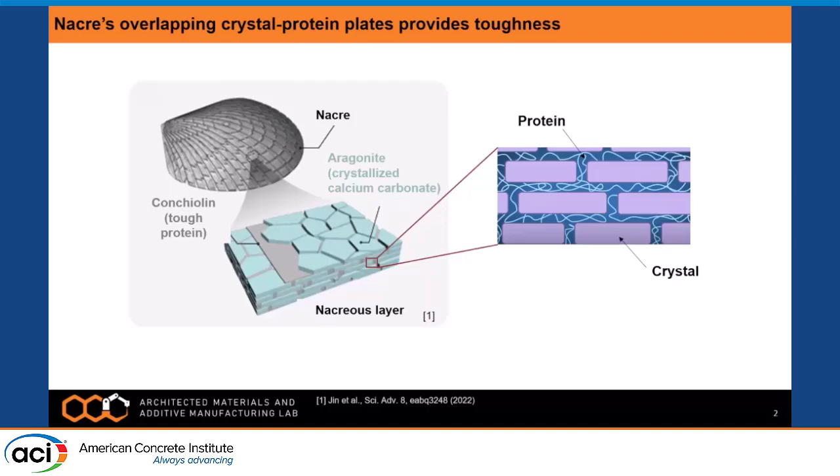The hypothesis we made in our lab was that these hard, soft multi-materials will enhance the mechanical performance. Before we can move on to talking about how we can 3D print these things in the lab, we can make a hypothesis that if you combine materials of varying constitutive properties and arrange them in a certain manner, for example here we have a layered configuration, we can achieve a much enhanced overall performance.

For example, here we're talking about force displacement. You can look at the area under the curve where you see for the brittle materials, for the monolithic material, you'll have such a brittle response. If you move on to seeing what happens with a hard multi-material, you get a slight increase in toughness, but then a much more substantial increase in toughness if you look at hard, soft multi-materials.

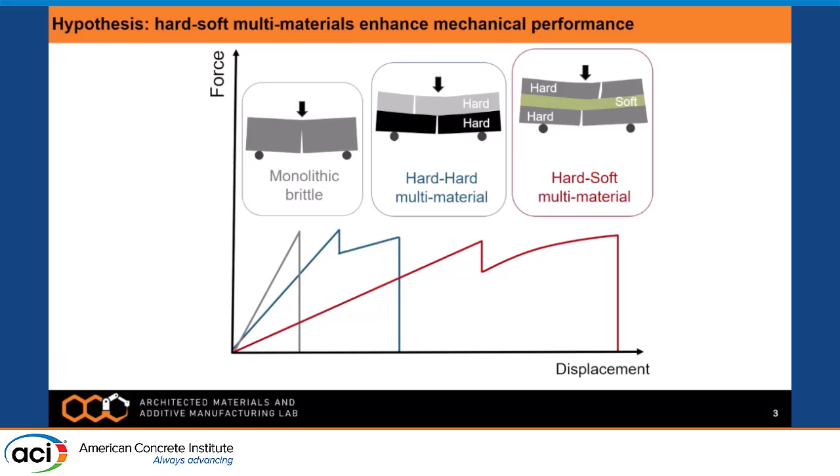There's a lot of talk about hard, soft, hard multi-materials, but what we really sought after in this work was to see how we can numerically investigate fracture in these materials to better understand the toughening mechanisms involved in the response to fracture. I want you to pay attention to a lot of what we're talking about today about the interface, because this is really important in these materials, as it will determine how your materials actually behave overall.

There's going to be a little bit of math right here, so bear with me. The last couple of presentations didn't have that much math, so I'm kind of making up for that right here. What we have is a model we've worked on, basically called phase field. If you're not familiar with this, it's a continuum-based model that looks at fracture in a macroscopic manner. What we do is, if we look at, for example, a bar, it has a sharp crack in the middle.

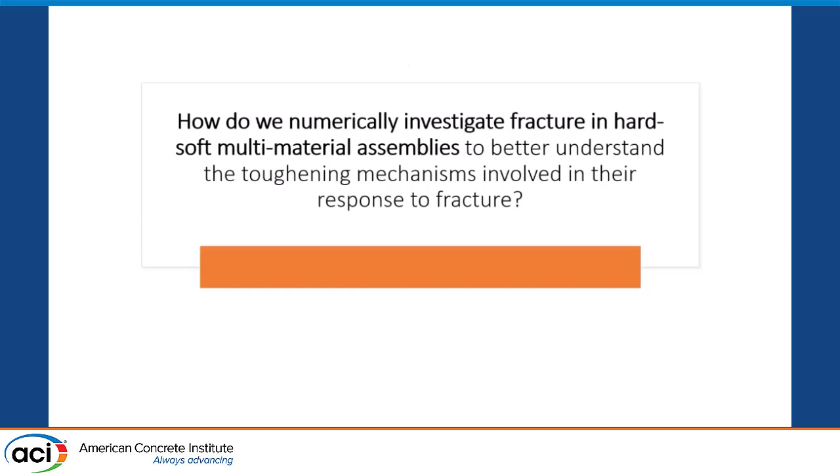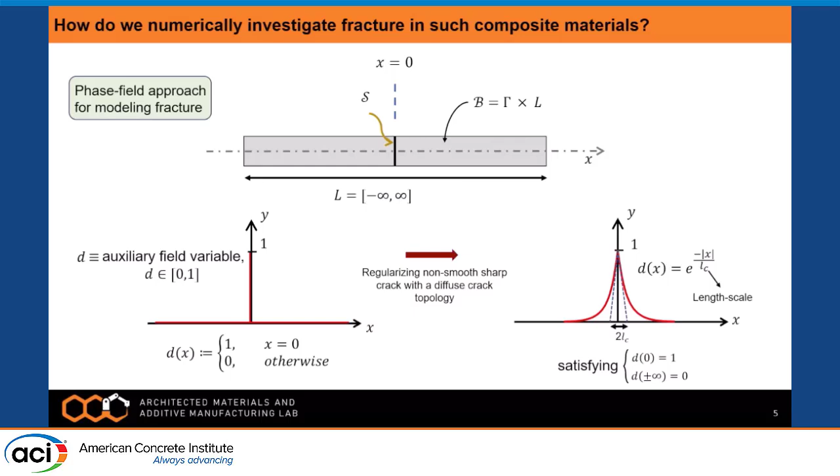What we want to do in these types of models is regularize that sharp crack topology, going from what you have on the left to what you have on the right. We go into a diffuse topology by regularizing the sharp crack into a region within the material, the specimen in this case, that has a finite length scale, which we call LC. As LC goes to 0, you recover the sharp representation, and it's a pretty good way to look into fracture in a diffuse representation.

If you move on to multi-dimensional configurations, what we can see is we can quantify this damage, or this phase field fracture variable, by a variable that we call d. This d will go from 0 to 1, 0 indicating no fracture and 1 indicating full fracture.

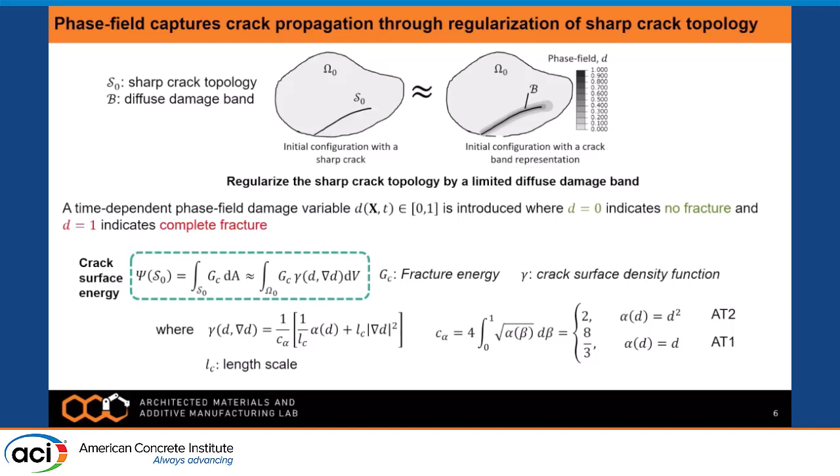We have this crack surface energy expression that is a function of the critical energy release rate. If you go from the surface integral, which is the sharp crack topology, to a volume integral, which now takes into account the entire contribution within the continuum, you get this integral that is integrated over the entire volume.

If we look at the total potential energy for this system, it's going to be written as a function of your usual terms, which you can see as a function of the strain energy, the crack surface energy, and the external energy, which is the applied load or applied forces. Then by using the variational principle, we subject this potential to a minimization with respect to U and D, being the displacement field and the phase field respectively. Then we can arrive at a solution for both fields.

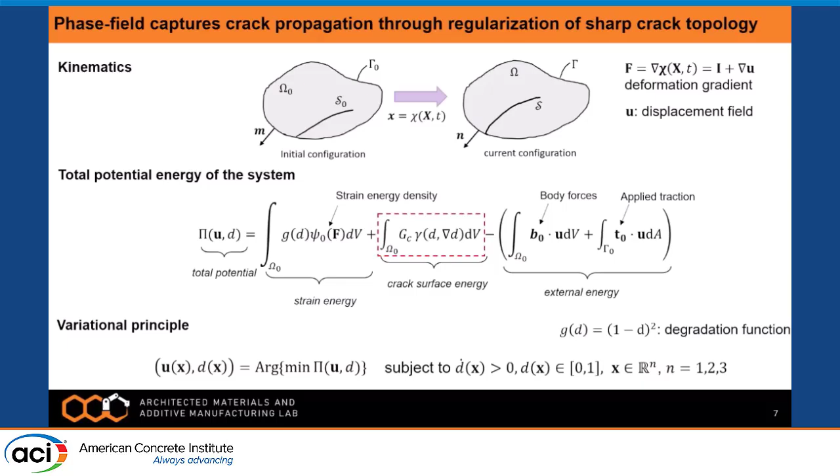And so for the interface, again, because that's the component that I added, I wish I had my pointer right here. Does this work for the pointers? No, but let me try to see if I can have my pointer real quick. Oh, perfect, okay.

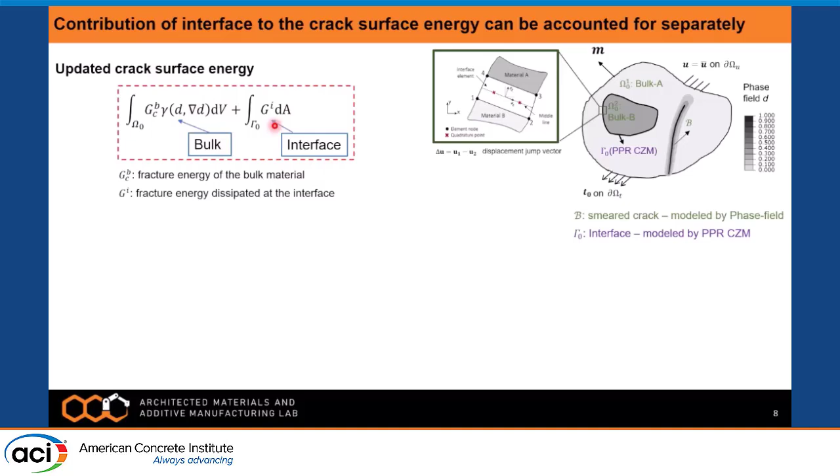This part of the interface, which now I added to my crack surface energy potential, you can see I can convert this into this expression, which takes into account the delta U, the displacement jump at the interface. If you have an interface, you have to find a way to calculate that displacement jump at the interface between the two materials, and you multiply that by the traction forces happening at the interface.

The updated total potential energy of the system will be the same as before, but the difference now is this additional component I added for the interface, which can be modeled using a simple CZM approach.

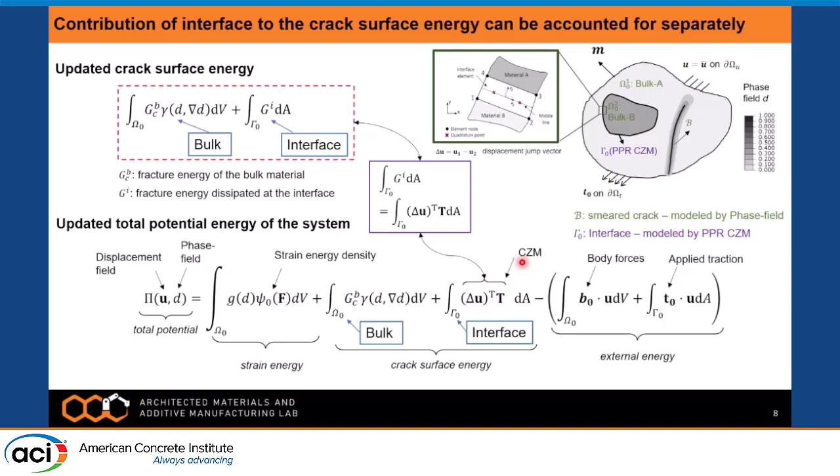In this case, it's not so simple because I'm working with the PPR constitutive framework, which was developed by Park, Paulino, and Roesler. This was used because it is potential-based, and potential-based CZMs have been shown to represent a much more physical representation of the interface rather than displacement effective based methods, which sometimes can be incomplete. In this case, you have your typical traction separation law, which can take this form. If you implement that by taking the derivative of this potential base function with respect to the two displacement jump components, you get your normal traction force as well as the tangential traction force.

And then that is exactly what goes into this expression right here. You multiply by the displacement jump, and then you get your total energy potential for the surface energy for the interface. Now, this is all great, right? So what we did right here, we also did a lot of experimental characterizations, which I'll show in later slides. And then this is exactly to get these quantities right here, as you can see.

So GC int means the critical energy release rate with respect to the interface in the tangential as well as the normal directions. And so we can actually run experimental tests to get those values for some of the modeling simulations I'll show in the next couple of slides. And we can do the same thing for the traction forces in the normal and tangential. So we can conduct experiments to measure those two properties. So this is all something that we can actually work with because we can find these properties just using experimental testing on the various materials that we want to look at.

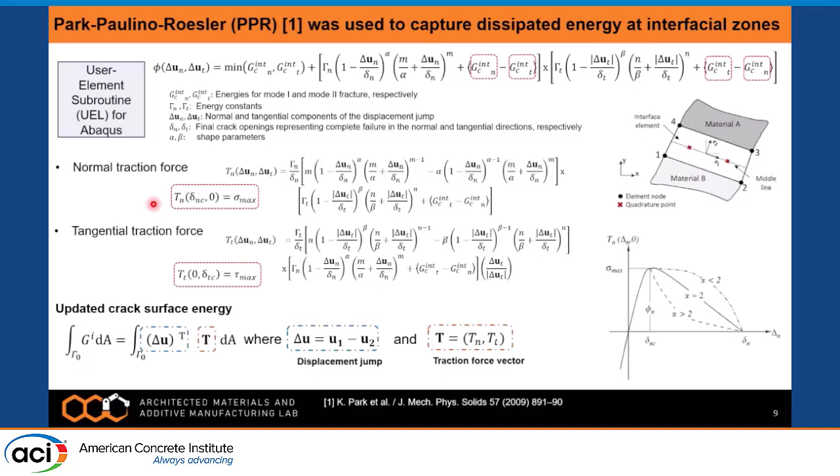And so I implemented that framework that you saw on the previous slide in Abaqus. If you're familiar with how that's done usually, we write a UEL, a user element subroutine. So I wrote the code in a user element subroutine and implemented it in Abaqus, and I wanted to test it for a couple of cases right here. Right here I have case one, which consists of a hard-hard bilayer composite. Here you have an interface perpendicular to the initial notch. The second case was looking at a similar problem, but now the interface is slanted with respect to the initial notch by some angle.

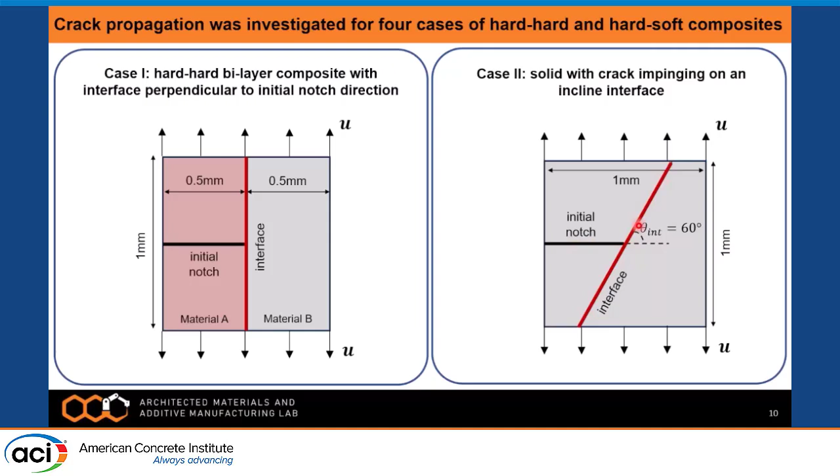And the third and fourth cases now consider the incorporation of the soft layer, right? Just because I talked a lot about the hard or soft multi-materials, and so here we want to see if we can really simulate these hard soft materials by actually looking at the large deformation component as well. And so again, here we have this sandwiched soft layer in the middle, with two harder materials on either side of the inner layer. And now right here we just have a usual fiber reinforced composite. This can be the fiber reinforced concrete that people have talked about in the presentations earlier.

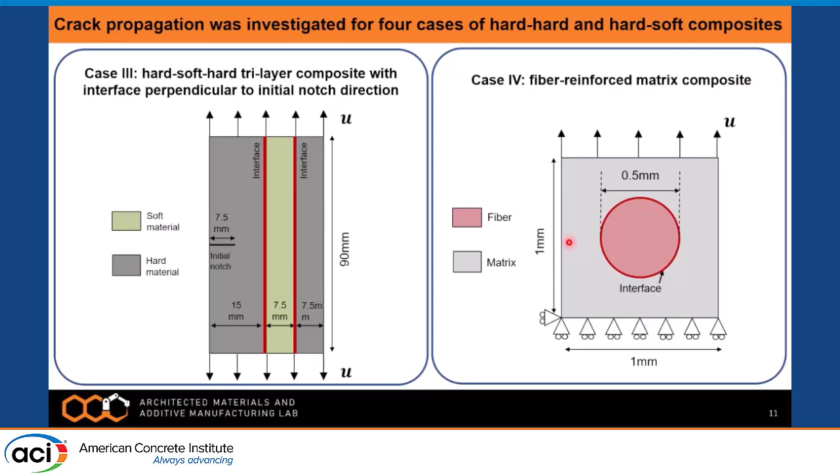And so looking now at this first case, linear elastic fracture mechanics shows that we have two predominant crack growth mechanisms in these kinds of materials. We'll have crack deflection or crack penetration for these types of problems. Deflection means that the crack will deflect along the interface, as you can see over here, so on either direction of the interface. Penetration means you actually poke right through the interface and go into the second material and actually break the material in two, right? This is not what we want to have in a design that we make. And so if we're able to actually simulate this, it would give us a lot of insight about how to go into design for the future and for how to deal with that.

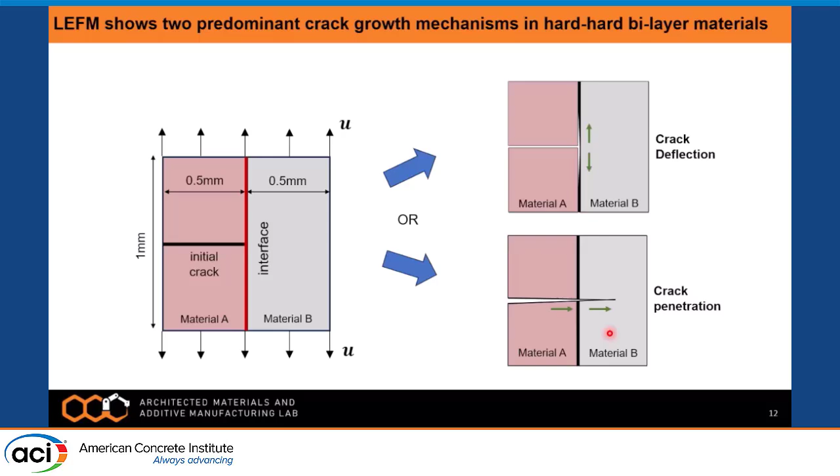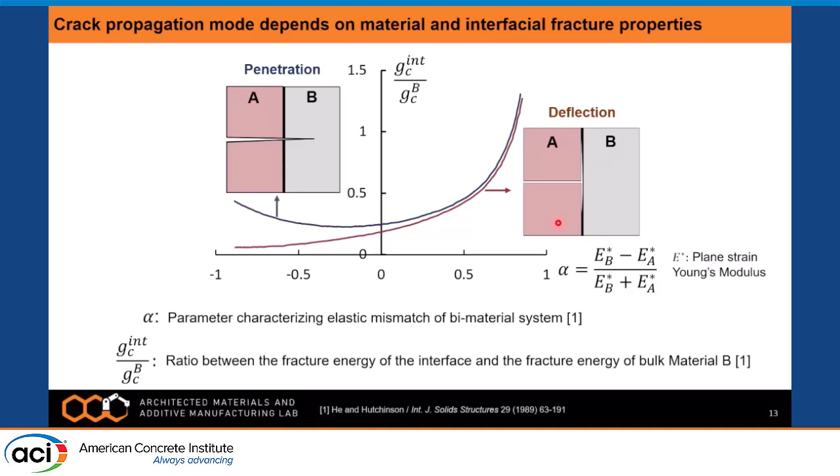And so LEFM says that the degree to which penetration happens over deflection, right, these two mechanisms, will depend on this ratio right here, which is the interface critical energy release rate to that of the bulk material. So the ratio between the energy release rate for the interface to that of the bulk material, and this alpha parameter right here, which quantifies the degree of dissimilarity between the two materials, A and B. Okay, so if you're anywhere on the top right here, you're going to have a case of penetration. If you're down here, you're going to have a case of deflection, right? And so we can choose material parameters or properties that will land on either side of this space right here, and we can run a simulation and see if we can recover the response that LEFM actually predicts. And so that's exactly what I did for the case of penetration. We made a model.

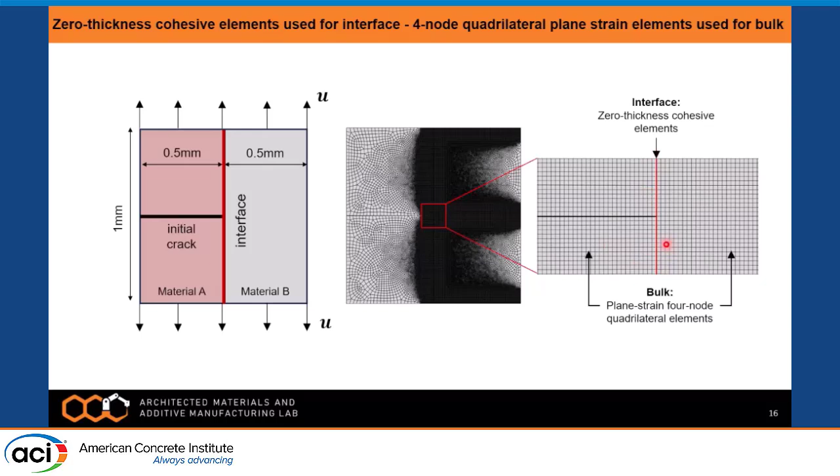We discretized the finite element mesh. We can put the interface as zero thickness elements in here in the middle, and then anywhere else we'll just have bulk plane strain 4-node quadrilateral elements.

We can choose material properties that would typically land us on the penetration space, and we can run the model and see if we can recover that. Lo and behold, we get exactly that kind of behavior. As you can see, we ran the simulation and we have a case of penetration right through the interface, which is what you would expect to see from LEFM.

Now for the case of crack deflection, we can do the same thing, but going down to the deflection case. Again, you can see that we have exactly that deflection, as you'd expect from LEFM, where the crack deflects along the interface.

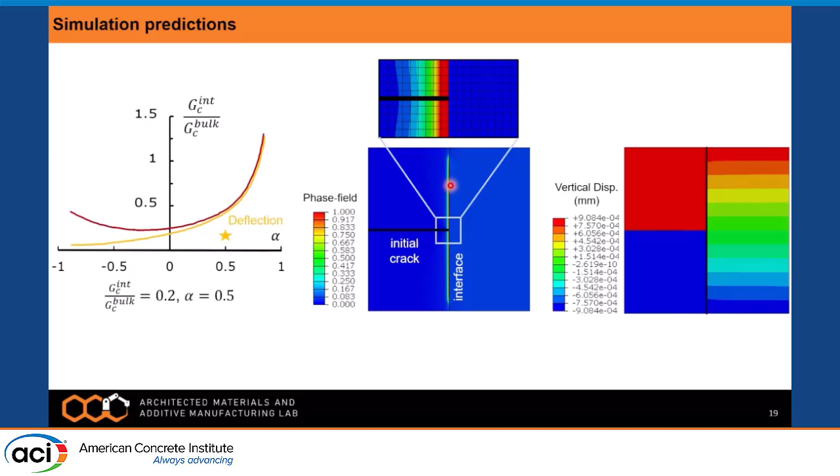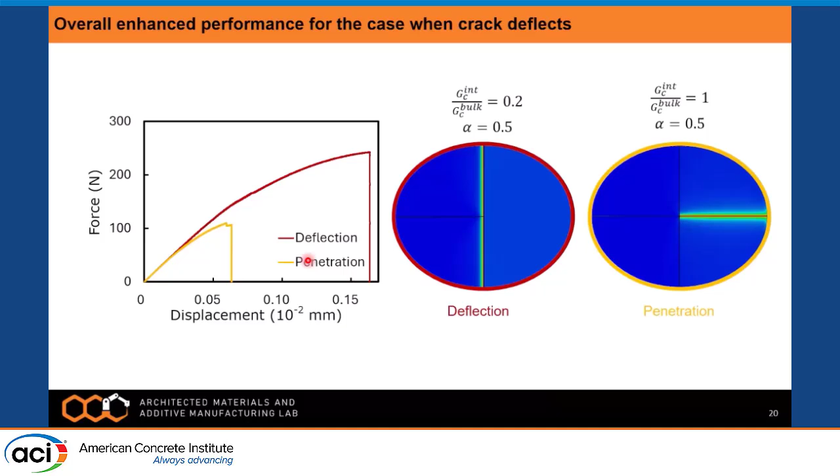We can compare the force displacement plots for these two scenarios, and you can see we have much lower peak force for the penetration case, as you would expect, because it's not something you'd want, since you really break the material in two. We're able to see that very well here.

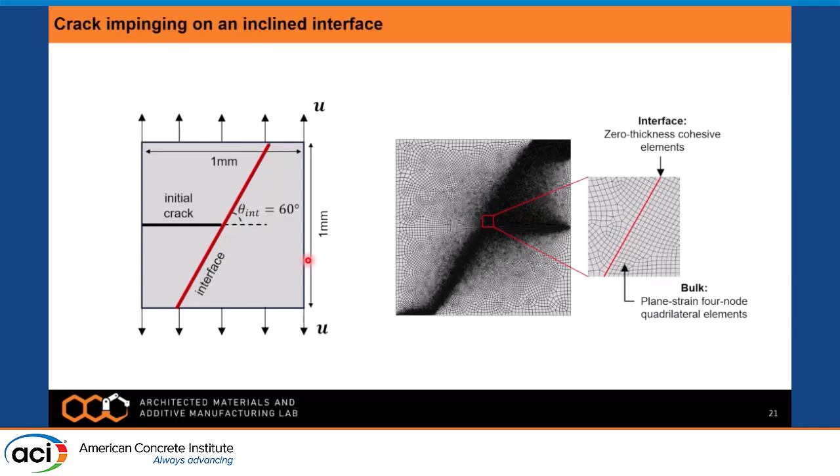Now moving on to the case of crack impingement on an inclined interface, we can again insert our zero thickness elements in that region, and look at what LEFM predicts for these types of composites. You have this ratio of the fracture energy of the interface to that of the bulk material, as a function of the theta angle, which is the angle the interface makes with the initial notch.

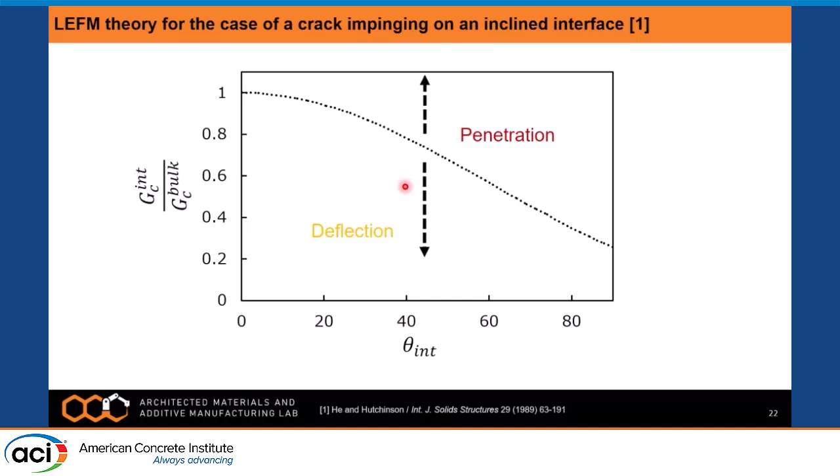You have penetration up here, but deflection down here. We can choose material properties for both the penetration case and the deflection case. For example, here I'm showing both cases, and the model is able to predict very well what the LEFM theory actually says.

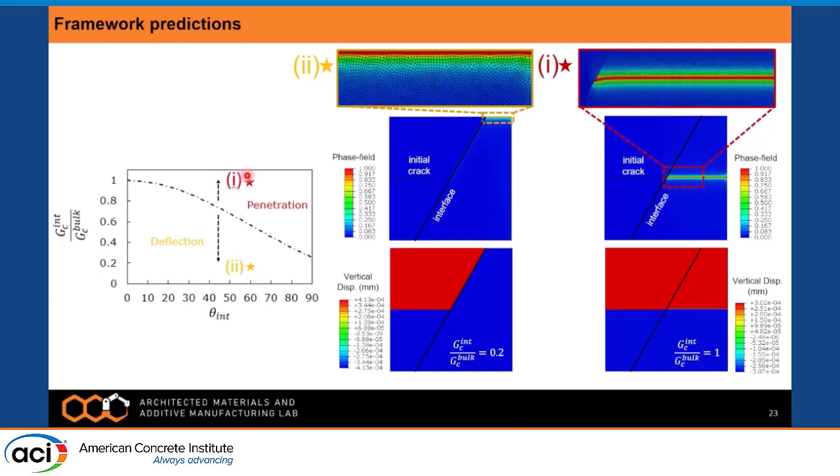So you can see right here we have deflection along the interface for the case where we pick these material properties, and we have penetration for the case where we selected these other material properties. That's again all great reinforcement for the fact that the code actually works.

We can see what happens if we just look at the deformed shape, and again you can see very well that the code works very well.

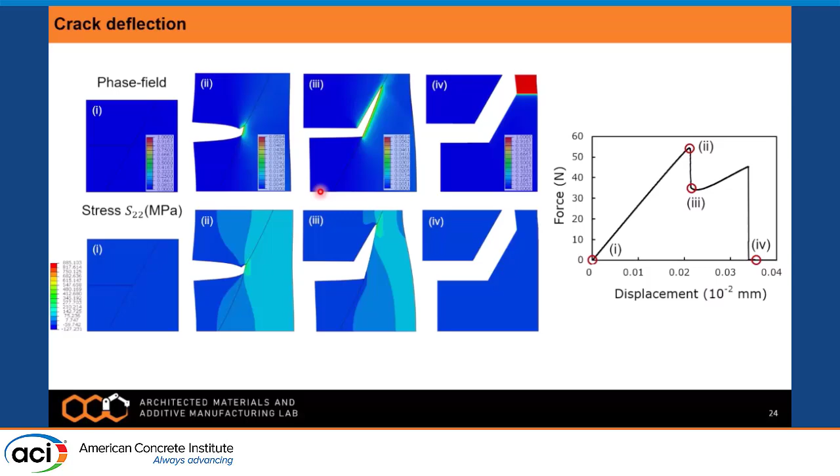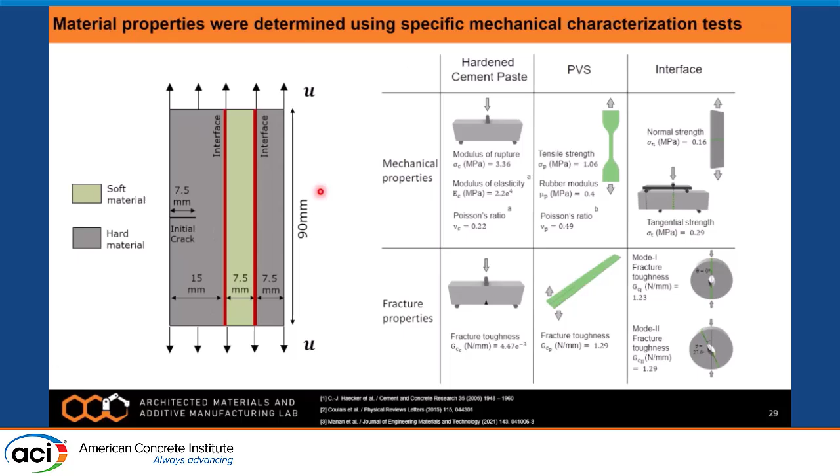Now I want to move quickly to the case where you have the hard-soft composite. As I said before, we can run experiments to get the mechanical material properties, and then run simulations.